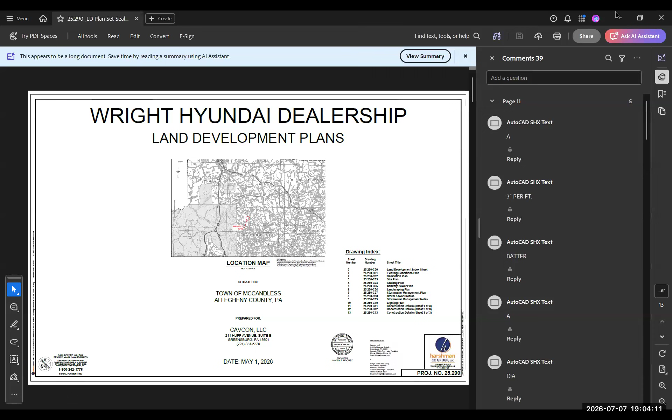It's been boiled down to your current engineer comment letter, and my opinion is that all of these are really housekeeping things that will not affect the overall plan at all. A lot of them have to do with some stormwater nitpicky things that honestly are not going to change the plan, but we've got to get some clarification. One example would be the energy grade lines, hydraulic grade lines of the storm sewer flows. We've given the water surface elevations. Grade lines of the energies are below that. So again, the additional information doesn't change anything.

There's some volume calculations where you get two different numbers because you have to prepare calculations 2 different ways. Some clarifications, again, it won't change anything. I don't want to belabor you tonight. I'm willing to go through all the comments if you want to. However, I do believe that they are all of an engineering housekeeping nature that would not affect the overall plan. Commissioner Clark, I could see you might have some questions for me and maybe others do as well. I'll be glad to answer those.

I would like to front load my presentation tonight with the hope that we could have a conditional approval on this plan, subject to us satisfactorily addressing these comments with your engineering or planning staff. Obviously, that's your decision. I think we're in a good place that we ought to be able to do that. So if you have any specific questions or you want to take a look at the latest plans, I would be glad to talk you through any particular items.

Start up here on the panel. We'll start down at your end. Bessie, anything? Ron? No questions for me. Mr. Jones? Sorry, I'm just looking at the engineer's letter now. That's fine. I didn't really get the impression that all the concerns had been answered, so. I'd be glad to talk through those, and if we haven't, we need to get that done for you. It's the engineer telling us whether they've been resolved, so.

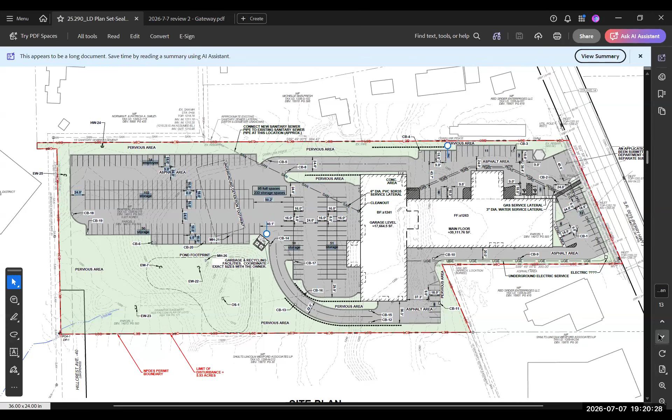Matt, you get a second, you want to flip to our landscaping plan? And so this is again for discussion. Let's see if we're on the right track with what we got in front of the town today. So if you zoom into either of those two areas, you will see the dense row of shrubs, and hopefully we labeled that.

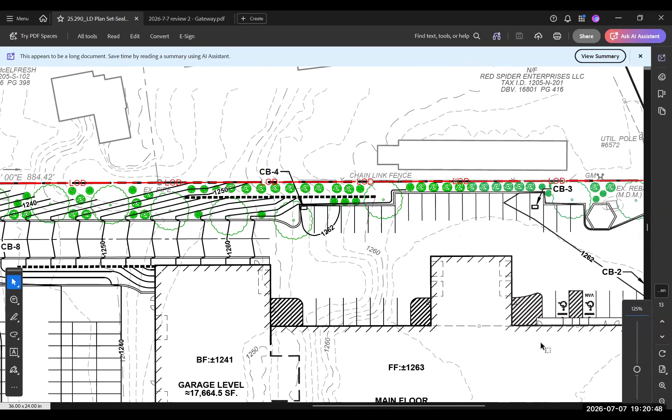There you go. So there's one spot where we've got dense growth shrubs to the north and then to the south. Those are the two areas of which we speak. And there should be a table on that plan, Matt, that identifies the species and the spacing. Sorry.

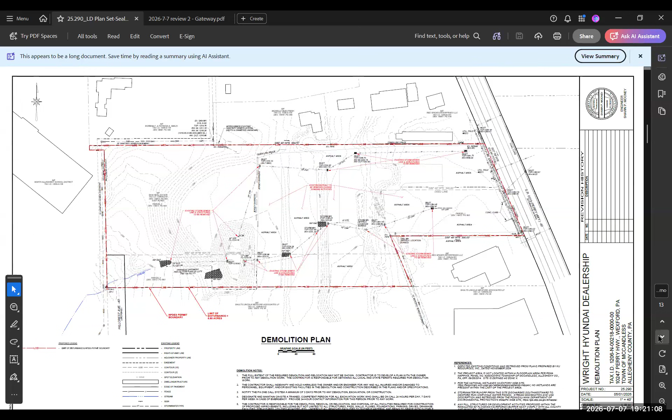Give me a hard time. That's right. I'm not sure.

What I'd like to see is that the buffering is just as effective in only half of the space. Very good. Okay, right, that's what I'm trying to get to. I don't want to have half of the buffering just because we have half the space. We'll do this also. I'd like to give you, between now and next month's meeting, a zoomed-up detail of that, just a little additional description so that it's more clear than just looking at all the engineering plans and details. Again, let's make sure we're accomplishing the intent.

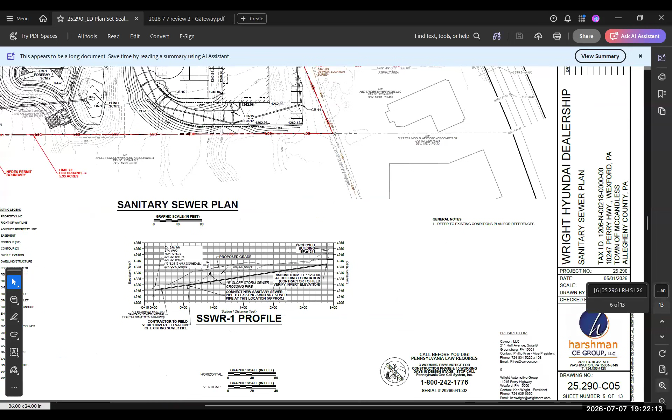Read that plan to see what the legend says. So, what is on the left? I'm going to assume, in that buffer in the front where you're looking at 7 feet, that those will be some sort of evergreen or constant. Yes, that's right. And I forget the name of them. I just saw it small on this plan. Let me zoom in, I can explain it. It looks like the symbols here that have the swirly, those are evergreens. And then the darker ones were smaller plantings.

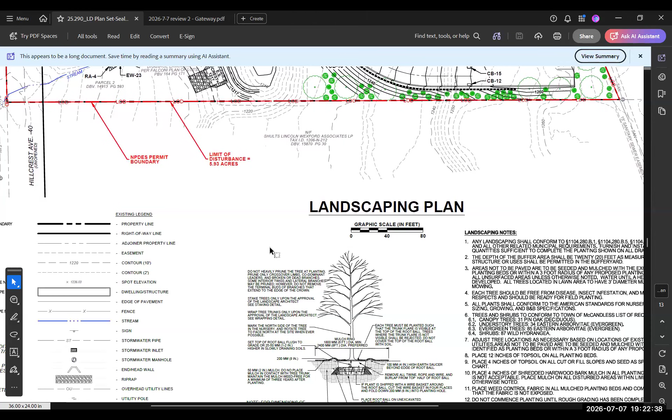And the specific species we had in mind, they're called like a tall boy or a big boy or something like that. They grow up real tall. You plant them to make basically a screening fence out of evergreens. And they'll grow up, I don't know. Yeah, I have it shown right here. It's kind of hard to see. It is within the plan set that you have in front of you, but they do show a tree planting detail and it is labeled on this landscaping plan. Last time I brought a whole hard copy of the drawings. I didn't bring them this time because of the screen.

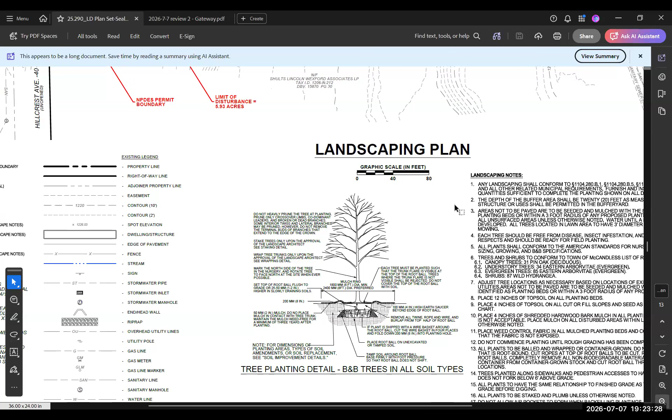And I hope it'll go without saying, but deer resistant, if that's even possible. Yes. The bush I'm thinking of, there are specific deer resistant ones. You see them all over the place. They're beautiful. They make a fence. You can't even see through. There's an arborvitae that is in fact deer resistant, most are not. Maybe that's what you're talking about. No leaves, nothing. You know exactly how tall the deer are in the neighborhood.

That's right. Exactly. I would even recommend, if you're going to showcase a little bit more regarding this buffer, you maybe want to show what the pre-existing is on neighboring properties and what the buffer looks like, just to give an idea. Yeah, pre-existing conditions, that's a point that I haven't done well communicating, because right now there's nothing, there's pavement right up to the property line, and I'd like you to be able to see the level of improvement that this would bring to the table. Having driven by there, there's pretty much just pavement. 90% of the property looks like a moonscape, right? I agree. And we appreciate you trying to improve upon that, because that benefits all of us. Yes, agreed.

So, did I steal your thunder on the buffer? Okay, so the only other thing, you're still working with PennDOT on the access? Yeah, so there are 2 third-party permits hanging out there: the NPDES permit through the Conservation District on erosion and stormwater, and the HOP. We know PennDOT built the entrances to this property. However, when we talked to PennDOT, they said, yeah, we built them, but you still need a permit for it. So anyway, that application's been submitted. The process with PennDOT takes a little while too.

Again, I know I asked you for conditional approval tonight, but in all honesty, it's going to take us a while to get through PennDOT and the Conservation District anyway, so we're tracking well, and this discussion is good. And the application to PennDOT, does it include a sidewalk that would meet the town specs?

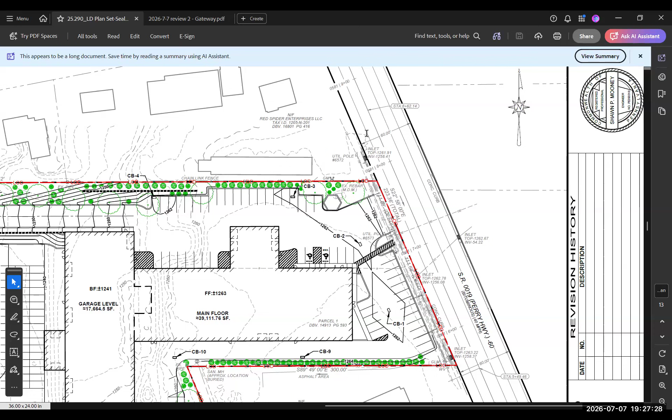All right, on to new business. PLC 26-16, Peebles Elementary School Plan Consolidation, Block and Lot 716-K-248 and 716-34. We have a presentation. The floor is yours.

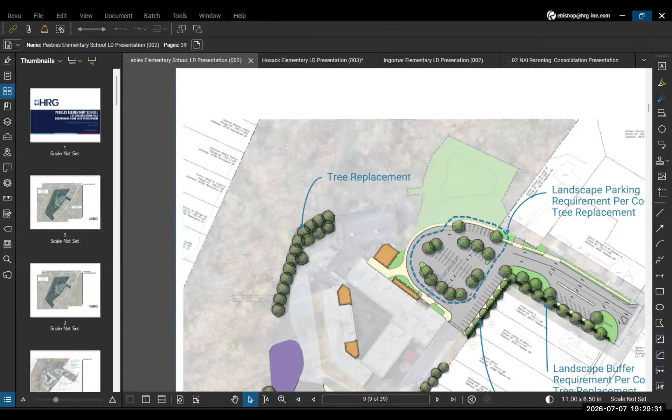We're gonna have Craig just present all the items, so I don't have to mess with this computer. Maybe we coordinate a little bit. For all the schools? Yeah, okay. All the rest of the items are all his items, so. Okay. You need to share. Are you able to? If not, I might have to just make you a host. You can see it. You on the bottom right above. Yours looks a little different than mine. I still have everything, if you need me to pull stuff up, I can, so we'll make it work. Totally get that, trust me. Big time, technology's technology.

Anyway, while that's opening back up, I'm Craig Bishop with HRG. I know I was here several months ago for Peebles regarding the rezoning for that residential lot. So we're back now with our land development submission for preliminary and final land development, and we also had the lot consolidation plan where we're consolidating that lot that was rezoned. I do have with me Brandon with North Allegheny School District, Josh from HRG, who's also working on this project, and Thomas with Schrader Group, who's the architect on the project.

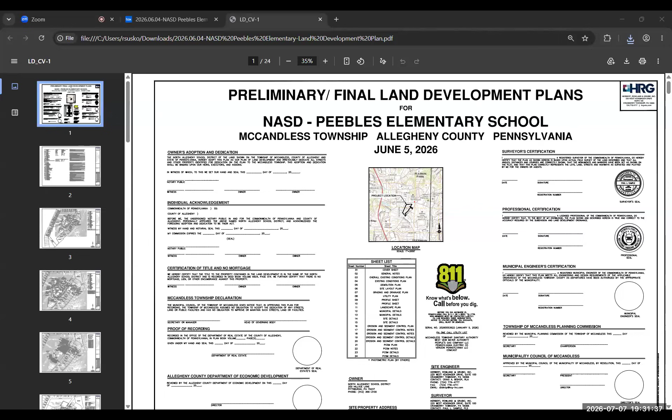And Craig, if you want, I can share the plan set, that's not too big of a deal. Maybe I'll just let you do that. It's fine, I do it every month. All right. You want to do the consolidation first? Yeah. Which item are we? The consolidation. The Peebles plan? We're on Peebles 26-16. That's what you're presenting first, correct? What is that?

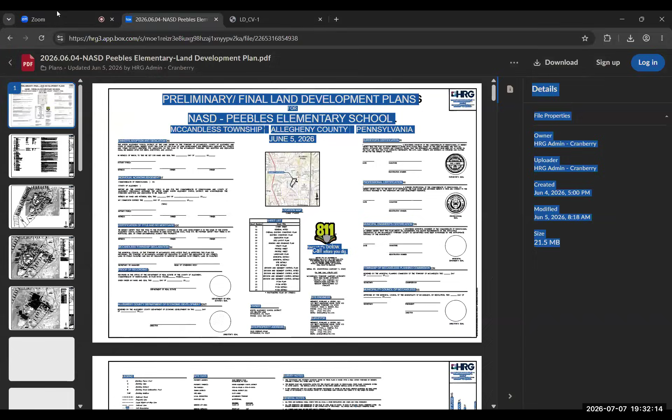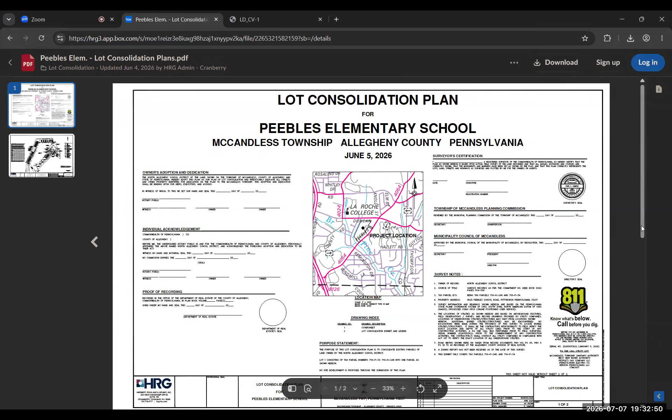So as I mentioned, maybe a couple months ago now, we were here for the rezoning, where we rezoned that parcel out front to SD, special district. So now we're back with our consolidation plan to consolidate that parcel out front next to the Peebles entrance drive into one large parcel. That would then allow the district to widen that entrance to make it safer for traffic and buses coming in and out. We submitted the lot consolidation plan and got some comments from Gateway. There are some plan edits, minor notes and calculations, and adjacent property owner information that will get cleaned up, and we'll resubmit and address all of those comments.

But I guess it was two separate. Yeah, so this is one application that is a lot consolidation and a land development. So we can correct that.

We're gonna act on one application for the Peebles item. The way we broke out the agenda was that there was a consolidation and land development for Peebles, for Hosack, for Ingomar, and then for the rezoning and lot consolidation — those are each separate items. So then, I don't know if you have the plans.

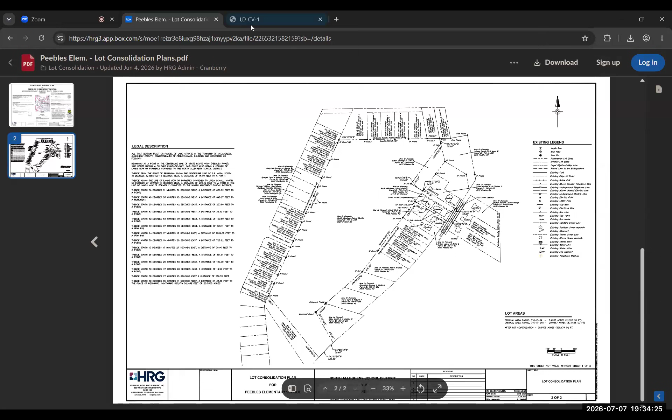I have both of them. Wish I could do my presentation because I had all these nice color things, and it was gonna be fantastic, and it's gonna answer all of our questions. I didn't hear that you emailed it to me, I'll pull it up. This way, plans. And you'll just have to do the next slide, please.

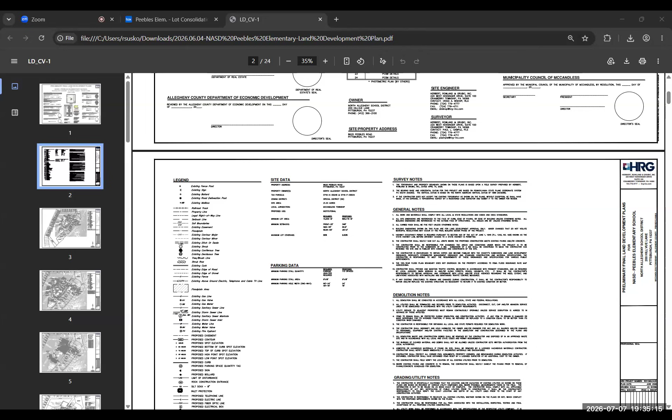All right, I got it up. You got it up? Yep, I did. There you go. Perfect. Sorry about that.

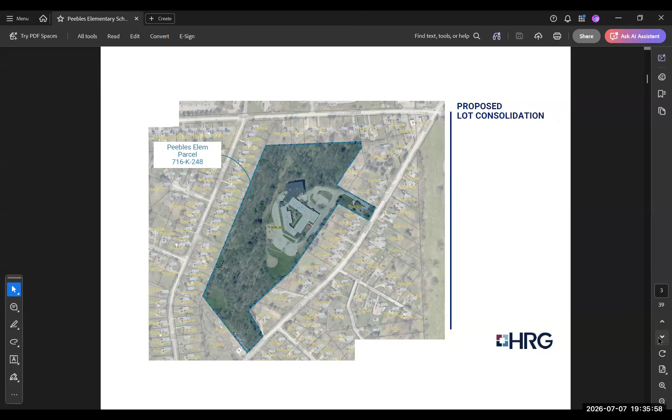So this slide is our existing conditions. I'm sure all of you are familiar with Peebles Elementary School and what's out there, but I can just do a little bit of explanation. In the front, there's a 20-foot wide entrance, and then there's that existing house that now will be consolidated. As you go back, the buses come in and go around that loop and drop off, and then the parents continue in and take a left, and they will drop off and pick up their kids. We'll get into more details later on as far as logistics and how we're looking to improve that pickup drop-off with these improvements.

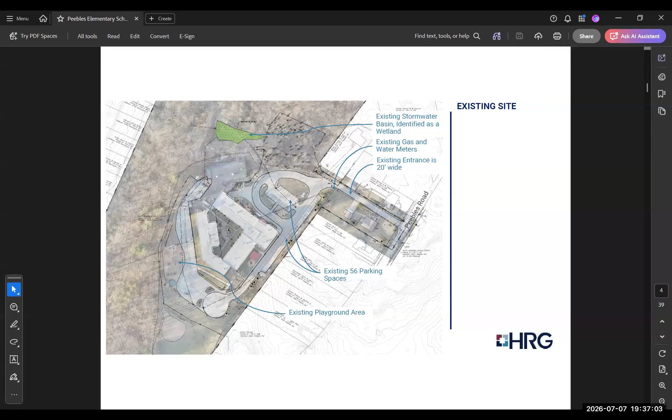And then there's also — sorry, Matt, go back to the upper slide — you can see something highlighted in green. That is actually an existing detention basin on site. We did go out to verify if there's any wetlands on the property, and that area was saturated with wet and did have cattails, so it was flagged as a wetland, but it's actually a stormwater detention basin currently on site that is currently managing their stormwater.

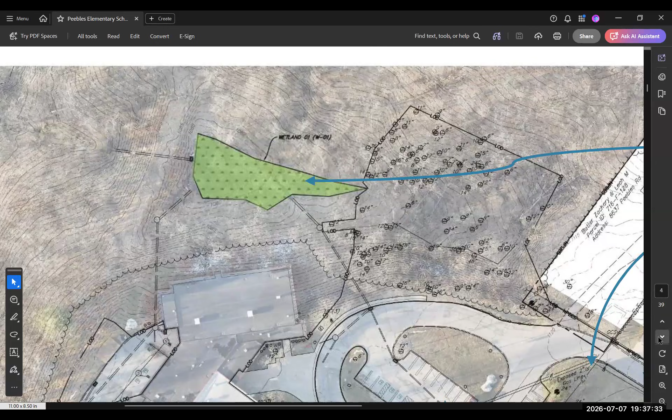If you can leave it there, Matt — actually, sorry — but to the back on the existing conditions, where that stormwater basin is, there were some existing trees, and we did go out to pick up which ones in that area were greater than 6 inches, because you'll see later on in our proposed improvements that we'll be impacting some of those trees, and we're looking to meet your guys' ordinance and try to mitigate those trees on site. I guess, Matt, you can just go to the next slide.

So he already kind of presented this and revealed our proposed site layout, but at the entrance is the main improvement that the district was really trying to achieve — to improve safety coming in and out of the site. You can see on that plan we have a 16-foot wide lane coming in to the right, and then going out we've created two lanes: a left turn only lane and a right turn only lane. We also have additional parking off to the side, and pedestrian sidewalks that would collect folks who may be parking in that space in the front and get to the entrance safely. We've also added sidewalk on the other side of the entrance where vehicles will be coming in, in case anybody in those residential houses — students, parents, whatever — would need to walk to the school. It provides them safer access to get their children to the school.

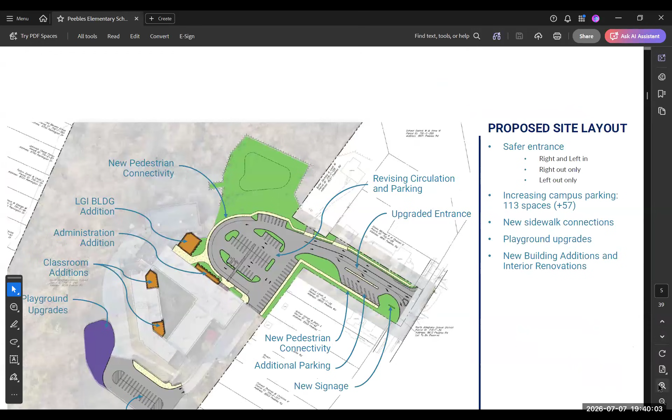So if people are approaching from the south, rather than having to cross the access road and then use the sidewalk on the northern side, they could just extend that southern sidewalk that stops at the parking spots all the way to Peebles Road. So anybody walking to the school from the south could use that sidewalk rather than crossing where people are turning in and out. Yeah, I mean, we could assess and look at that.

I think the reason we didn't do that is there was no sidewalk out there, and we didn't want to promote kids walking to the school on Peebles Road, which could be busy, without other connected sidewalks. I just thought it would create a dangerous scenario. But we could definitely look into it.

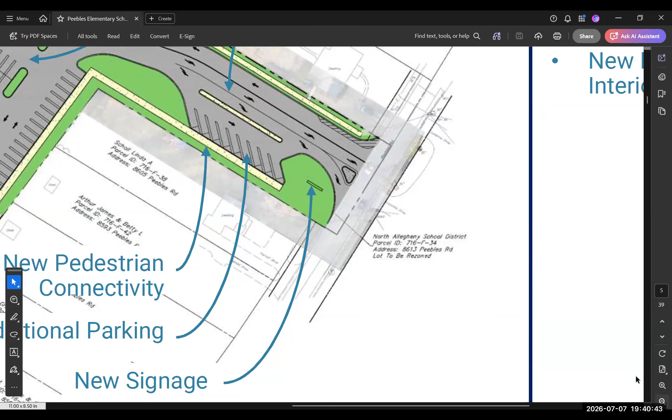Look at the sidewalk on the north side, you could create the other side. It would seem like we'd either want no sidewalks or... that's a good point. That's a good point. I can't use that one. Yeah, well, we'll look at it. Okay, that's valid, it's a valid statement. If there's a concern about safety, that's a valid thing to consider.

But then I would say, let's get rid of the little segment on the other end. Yeah, that would be my preference if it's a safety issue—there was no parking on that side, so there wasn't anybody needing it.

Is there room in the frontage to put sidewalks on Peebles, which would be a typical development requirement? There's a little bit, but it's pretty much all taken up. It is correct, yes.

Brian Chivolo, Director of Facilities, North Allegheny. The reason we have the sidewalk on the upper side is for a neighbor up on the street whose children go to Peebles Elementary. Currently there's no sidewalk there and it's a safety concern, so we requested to put at least a sidewalk up to the garage, and it seemed odd to just stop there, so it goes all the way up.

Can I just ask—is Peebles a walking school or is it all bused? All bused. But these people walk, well, they're the first house. They're just asking, it's all bused. Okay, well, let me clarify that.

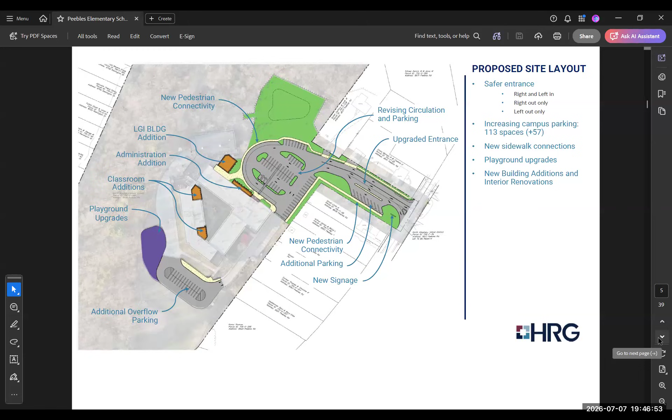So the additional percentage of lot coverage is with your additional driveway, parking, and buildings. Are you proposing, and is the engineer reviewing, that the existing stormwater management facility will handle that, and you're not proposing any further? We are proposing some, actually - that's a little further in the presentation, so I'll hit on it in a slide or two.

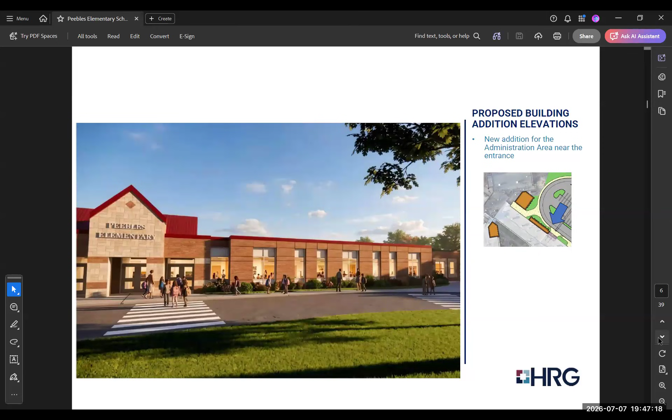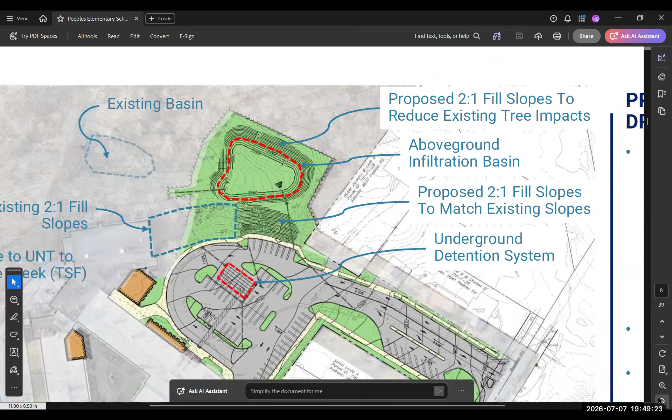It's a substantially treed lot - yes, that looks like there'll be quite a bit that will have to be removed for that stormwater. Yes, we'll get that done. You're spot on with your assessment of all this.

So we are providing some landscape buffers and things that are the requirements of the ordinance for screening and things for the parking. The landscape buffers, I know that there were some comments from Gateway. I think we need to do a little bit of cleanup and maybe a little bit of additional buffering in some areas. But to your point, Ann, we are removing a lot of existing trees that are over 6 inches in diameter. And the exact number, I believe, 74.

So we are doing our best to replant them on site. It's a little difficult because of how tight this site is, with their current ball field and their playground, and trying to keep good sight lines. We're not able to mitigate all of those trees that we're cutting down for this development on the property. So we were doing our best. We're well short. That was one of the comments that we did get from Gateway, and we did want to have a discussion with you all on how to move forward with that.

So I know in talking with the district, they would prefer if we could do a payment in lieu of for any of the trees that we can't fit on site, and we'll do our best to fit as many as we can. But as you can see, there's 74 trees. Is it possible to do plantings on other school district properties?

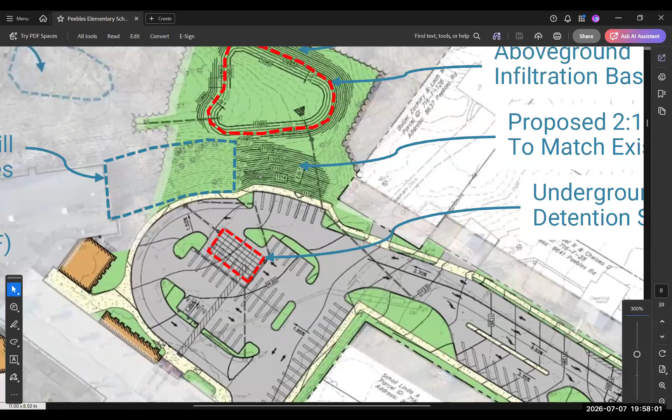Matt, if you flip back to our grading plan. Oh, yeah. Because we've actually wedged it in there as tight as we can. Oh, I know. So there's a steep slope we're up against. Again, that's something else I wanted to touch on, because as the other gentleman was here requesting a waiver from the slope requirement.

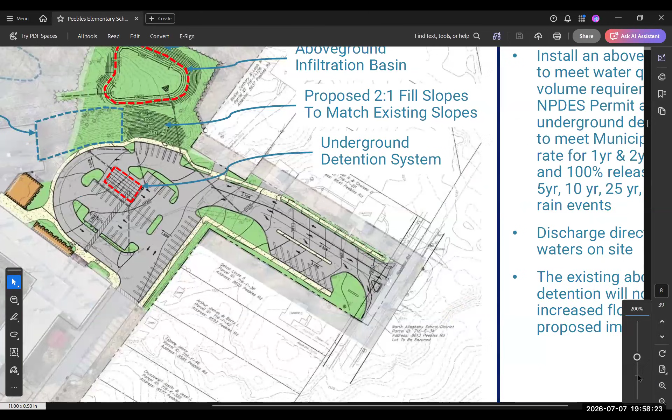We do have that on this project, so we are proposing a 2-to-1 fill slope. And again, we're trying to minimize the amount of trees that we're impacting by doing that. So if we did a 3-to-1 fill slope, that would go out a lot further, and then the basin would push out further, and then it would cut out more trees. So we've really assessed everything on this site, trying to meet all the requirements of the different agencies and your guys' ordinance, and taking that all into account, we felt like this was the best solution.

Can I just ask a practical question on the parking? Who's gonna park in those spaces in the front? Are you that short on parking? Yes, we are. Any given school day, especially during the AM and PM kindergarten changes, we have 15-20 cars parking on the grass now. And the reason why we're doing some of these additions, like the two in the courtyard, there's so much more outpatient therapy needs, counseling needs, special ed requirements. We're gonna only put 9 kids in a room. It's tied up more classroom spaces.

So we're not adding any staff, we're not adding any students to this building. It's just trying to accommodate what we currently have in a more efficient manner, and being able to have music in an actual traditional music room, not a classroom. So a parent picking up somebody from kindergarten isn't gonna be parking there? Up front, no, we're hoping staff's gonna park up there, so that way the parking in front of the building is open for visitors. Okay, and that's something you can control. Okay. Thank you.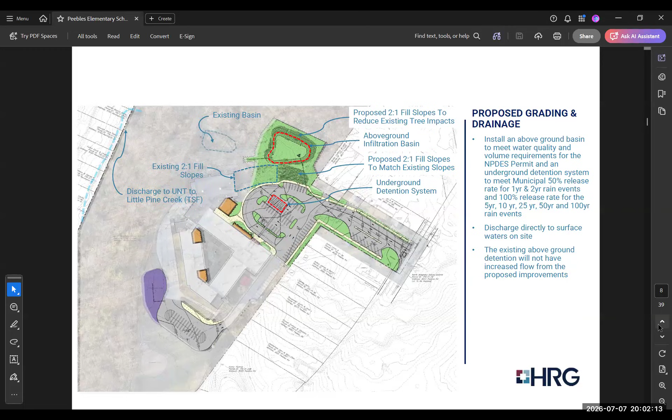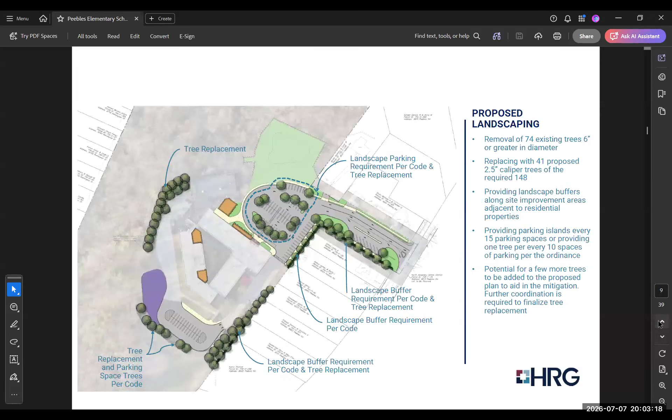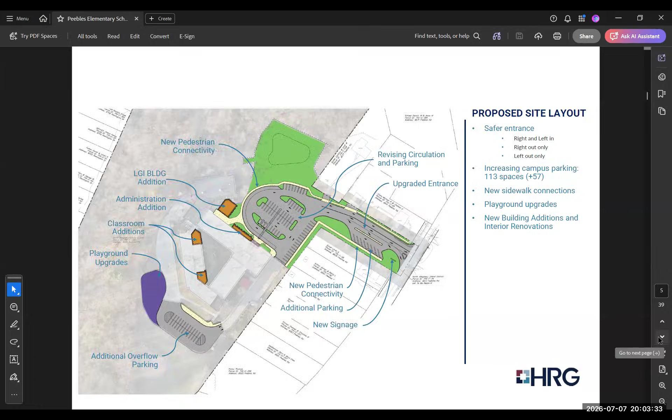So with these improvements, Matt, if you want to flip to the next slide, as tight as it is, it probably still isn't the best, but we're trying to do the best we can to improve this. The red is still going to remain as the bus looping and dropping the kids around the front. But in yellow, with some of this added parking, we are adding some extra linear feet for parents to queue.

So they'll still be queuing the same way that they are today, but they'll have a little bit more queue length. And where that congestion is, where the buses and the parents, the red and the yellow, may mingle together, we are widening that throat, which I did not mention previously. That was on our proposed improvements. So we are widening that to allow space, so if a car is there, a bus can make a turn and get out.

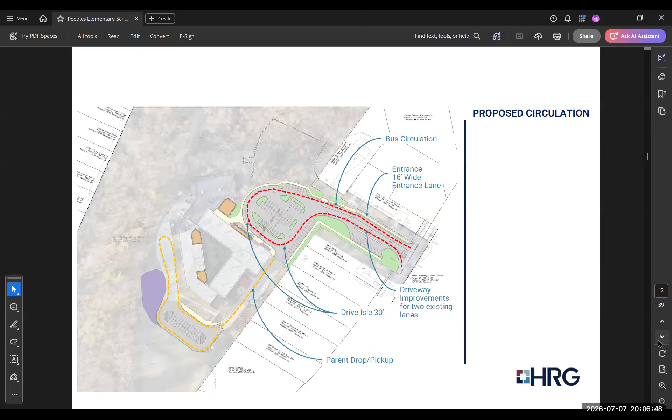Yeah, so then just some quick permitting updates. Like I mentioned, we have submitted for our NPDES permit. We did get completeness comments already, and we've addressed those and have resubmitted that back to the Conservation District. And I mentioned that we are coordinating with PennDOT on our new driveway entrance.

And I did just want to mention, since we're not increasing student count, we're not increasing sewage flows, so we don't need to do a sewage mailer or planning module. I don't want to go through all the comments, but I will happily answer anything that anybody has with any of these comments.

But there were just some of those items that I did want to discuss, and we did highlight some of them already, but I want to make sure that as we're making our revisions, we're all in agreement of the direction that we're going. So the one item, I guess, was on page 4 of 8. It was that sidewalk comment, and I know we had talked about that earlier.

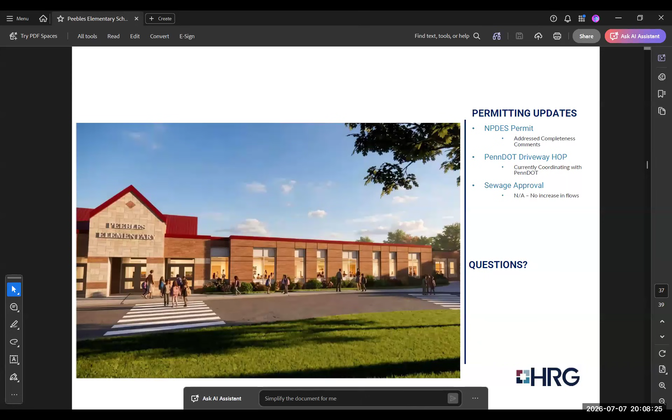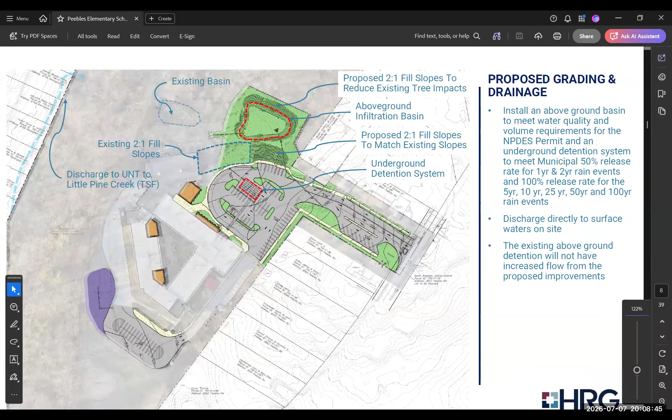There was only a little section there in the front, and the comment was about adding the sidewalk up along Peebles. As I mentioned, there is no connection to any existing sidewalks. So we were considering asking for a waiver for that and wanted to get any feedback from you all, if that is something you would consider. And we can revisit that piece in the front if maybe we pull it back.

To be honest with you, we did it because we talked with Matt and Kelly during our concept plan review, and they had mentioned McCandless was looking at maybe doing some sort of crosswalk there. And we told Matt, okay, we could extend the sidewalk out and coordinate with McCandless if McCandless ever wanted to put a crosswalk in there. So that is actually why we extended that out. Otherwise, we probably would have left it short like we did on the other side.

So that was one waiver request for this project that we'll be asking for. I don't know how to phrase the question. Modification. Yeah, and I can add to that, the town is actively pursuing some type of crosswalk here, some type of pedestrian movement in front of Peebles. So that was a part of the conversation and part of the pre-application meeting.

Should there be hatches on this plan for a crosswalk across the entrance? No, because it's not part of their development. It's something that the town is doing separately with PennDOT, in PennDOT's right-of-way, yeah.

Well, I would say, going back to the conversation earlier, to me there's two options that make sense. One is there is a future where we're going to be doing some sort of sidewalks along Peebles, in which case I think you want to extend both sidewalks to Peebles, to not promote people from the south crossing the road when people are turning in and out.

So where does the bus stop for that neighbor that's right there? It's in front of the garage. It's actually up at that curb cut. Yes, right there. So creating that sidewalk there, they'll actually walk down the sidewalk and around the building, so the sidewalk doesn't need to go beyond that. Correct. Okay. So we shorten both sidewalks.

How much linear footage on Peebles Road is there, given the location of both of these sidewalks and assuming that the southern sidewalk just keeps going straight? 4 feet? Cause the northern part was pretty close to that property boundary. Where that little driveway is, I'm assuming that's staying there, right? And that's not very much. It's probably like 30 feet there, right? Sorry, what?

He's asking how far setback the sidewalk is. No, on Peebles, assuming that southern one goes up to Peebles, just extending it. There's not very much along Peebles to put sidewalk in. It would probably be 30 feet. Cause that parking space is like what, 18, 20 feet deep? And then adjacent to Peebles, you're talking like a couple feet that would be in the right of way for PennDOT.

That was what Gateway had commented on, the requirement for sidewalks to be adjacent to roads. I think the question here is just how much are we actually talking about in terms of linear footage of sidewalk that's adjacent to Peebles, not going to the site? Like a couple feet probably, that PennDOT would have to approve. Yes, if it's in the right of way.

And I have a question that's tied into this, which is the comment about the screening buffer to the northern parcel. I understand if the sidewalk is gonna stay, and with not wanting to create more sight impediments for people turning out there, that you wouldn't necessarily want a big buffer right there. But are you gonna apply for a modification for that, or is there something that can be done to meet the comment but not require a modification?

So I wasn't gonna talk about that tonight, because I did want to get clarification from Gateway and Matt on exactly what the intent of that comment was. I didn't know if it was referring to the parking spaces that are close to that property, like screening the corner of that parking. If that was the intent, then it would not really be going along the entrance to impede visibility. Sure. But I did want to get some clarification on that.

Off the top of my head, going back to the filtering and softening buffer requirements, I believe there's a requirement for any adjacent property to have some type of filtering or screening buffer. I think that comment would have been, is there a formal request for a modification adjacent to these two residential properties? Because technically the code says you have to have a buffer for any portion of your development that you're extending, from my understanding of the code.

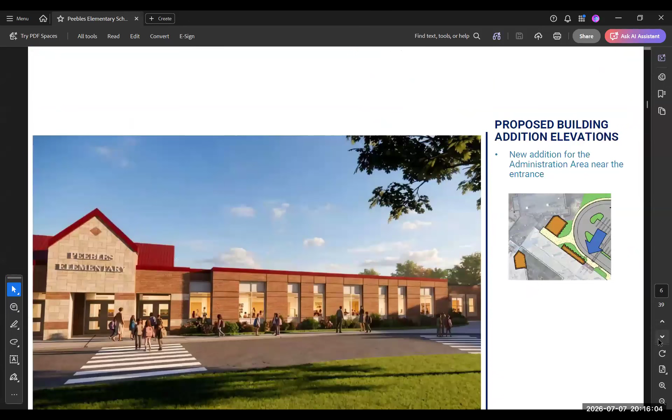For that sidewalk, I'm not concerned about safety because of where it's off the driveway. I think that comment was on the opposing side from the parking, about whether there should be a buffer requirement, or what the code says, and whether you're requesting a waiver. The ordinance does say the sidewalk can be within that buffer, so by the time you add the sidewalk, there's not much space anyhow, so we're looking at a potential trade-off.

All right, so that was the presentation for PLC 2616, Peebles Elementary School Plan, Combined Preliminary and Final Land Development and Lot Consolidation, for Peebles. Yep, that's Danny.

Do we have any public comment that we haven't already heard? I'd say no. Okay, so we can take a motion on this one. So we would motion to table this, as I understand the plan. That's my recommendation.

Should we give you a discussion on your retention area, where we're cutting the trees down? Did you ask for alternatives, like planting them on other property? I feel like we've really assessed the site. There may be able to squeeze in some more, but I didn't want to keep adding a bunch of trees in areas because the district has a concern with safety, so there was no way we were going to meet those requirements.

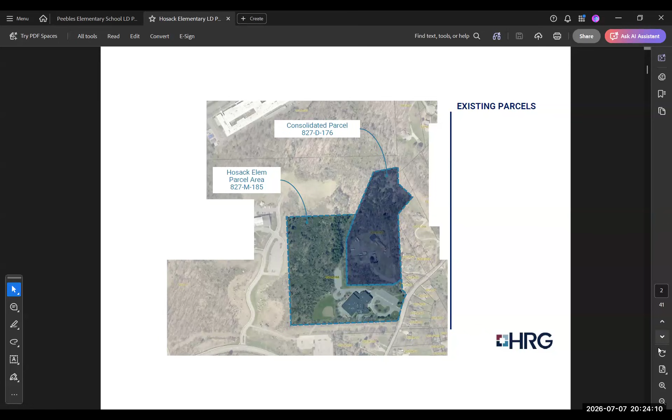If you still want to go to the slide, this slide was just showing those lots being consolidated and what that overall tract boundary would look like.

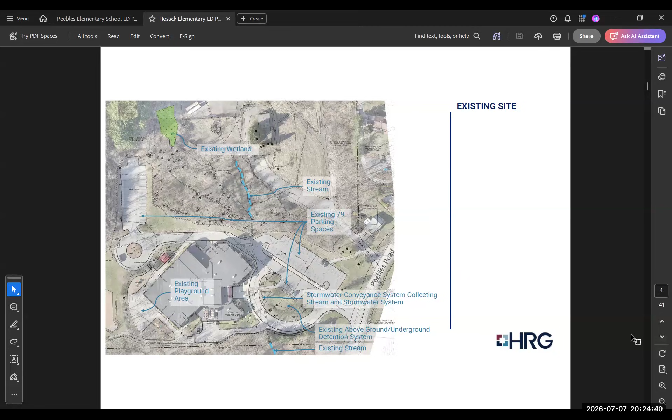Again, as we talked about at Peebles, this is existing conditions, so I'm sure a lot of you are familiar with this facility as well. I won't go into a lot more detail like I did on the other one, but I did want to highlight, on Plan North you can see in blue we delineated a stream that was on site, and in green in the upper left is a wetland that is on site as well.

Go to the next slide, Matt. So this here is our site improvement plan.

Similar to Peebles, we were assessing parking and trying to maximize the need for parking for the district and traffic flow as well. And then they're also adding, similar to Peebles, onto the administrative office area to the front, and adding an LGI addition. As part of this project, they'll also be redoing the playgrounds, getting new equipment, and revamping that whole area at the back.

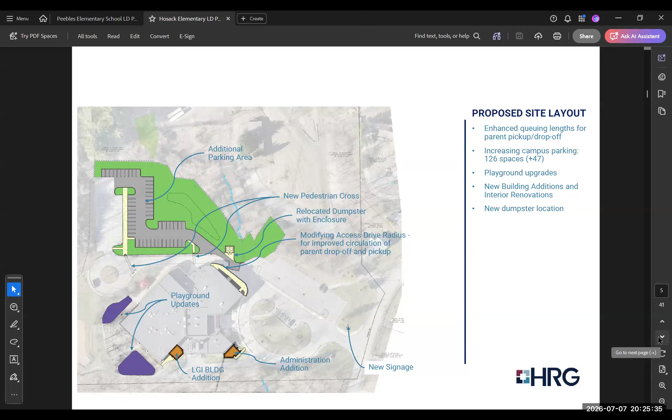You can go next slide. So this here, again similar to Peebles, is just the elevations showing these additions, showing that the materials the architect is using really do a good job of matching to have it blend in and make it look like it was always there.

If you go to the next slide, that's the LGI room with the bump out. So they added some great windows there to add some natural light, playing off the materials of the building to help it blend in.

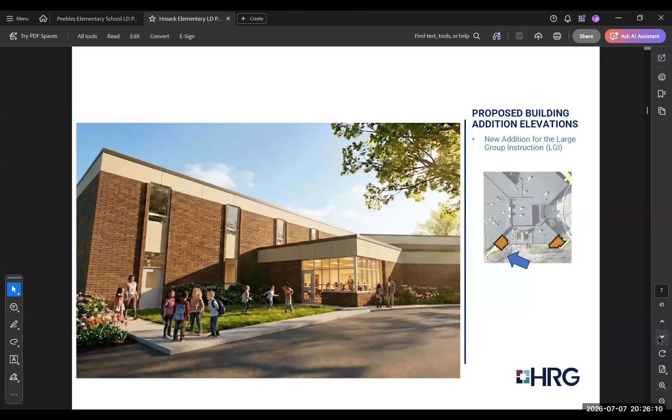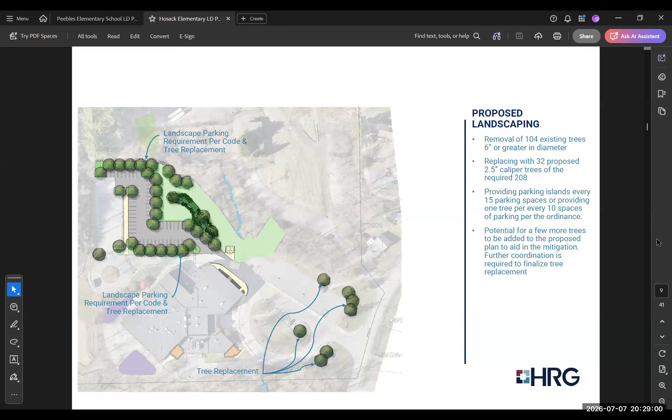On the corner, there's still two existing buildings there. We're looking at demoing those out, and that would add to some green space, but there's also talk about possibly looking at developing something there. So I hate to say we can put some trees there, but then we're coming to you in 5 to 10 years saying we're taking them down. I just want to be transparent with that.

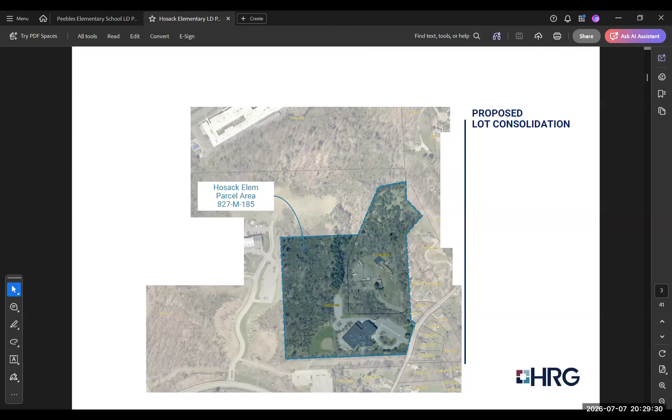The additional parking that we're showing there is twofold: one, it's for additional parking; two, it's for the car rider traffic. It goes around the building that way, and right now it does back out onto Peebles Road. So providing this additional parking gives us more cars we can fit on the lot for pickup and dismissal.

Don't tell us you have a junkyard on site, please.

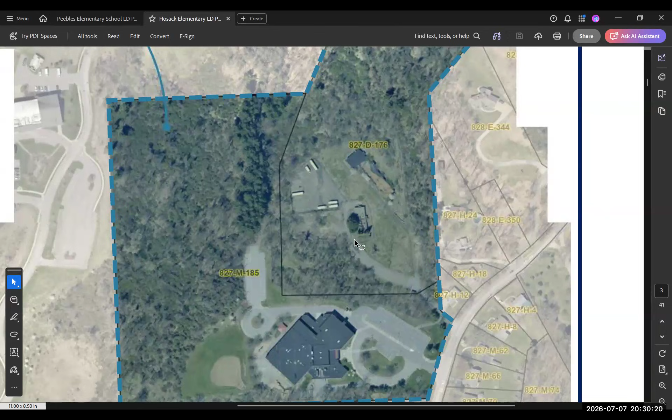Right, no, we don't. But there are also buses that we do keep there, and we need them for the spring season athletic runs because the athletic runs need to leave so early. We don't have enough buses on our lot at Cumberland to accommodate keeping them parked there, so we keep them parked over here. But this is previous experience with these former Nike sites.

Have you done the ground survey for hazardous material? You can disturb the ground.

I'll leave that with you. Yeah, no, we have not done that yet. I know the district is looking at demoing those buildings, so I think that was probably something that's gonna come up when we come to McCandless to demo those. Yeah, I know all the soldiers there were very careful about all their petroleum and fuel spills and all the rest of it. We ran it. I was the Corps of Engineers. We took the Westview site and we ended up, we couldn't touch it. I mean, we couldn't remediate it. Yeah.

So you are doing that investigation? Well, if they move forward with the improvements and things on there and they do want to look at demoing those buildings, I think as part of that, as a review with McCandless, that's probably something that was going to be required. What about the areas you're disturbing? It's still part of that site, right? Things could have migrated. That was just a question. Yeah.

If you're doing soil testing. Yeah. We did. Yeah, we didn't do it. We did testing for infiltration and stuff in that area. So far? No? We did do a geotech. We did it for the buildings. But we did not do borings out in that area. You can, as long as you don't disturb. So it's like- I'm sorry.

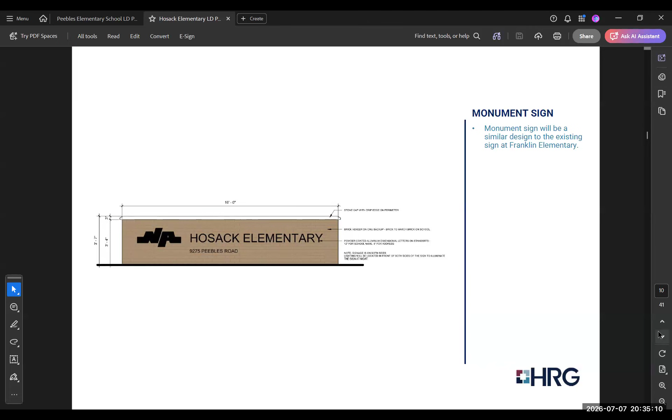Again, just showing a monument sign that'll be proposed on this side out front, so it'll mimic the building materials similar to what was shown at Peebles, and we'll match the Franklin Elementary School monument sign. As Brandon talked about a little bit ago with the drop off.

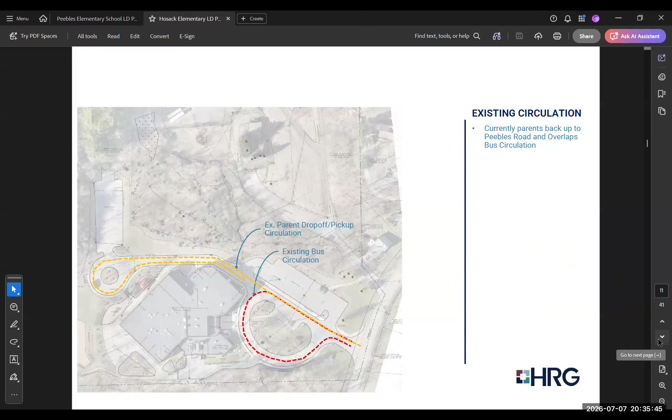So one benefit with this plan and the location of the parking is we will greatly improve queuing at this site. So this is the existing circulation. The buses come in there in red, and then in yellow is currently where they're backing up, which is out towards Peebles. So there's a little bit of congestion there with overlap with buses and cars and vehicles backing up on Peebles. So if you go to the next slide, Matt.

So here, the bus circulation will remain unchanged, but by adding that extra parking in the back, what you're seeing in yellow is actually the same length that was shown on the previous plan. And we're beyond that pinch point where buses and cars would come together. And if it becomes a problem, they could even loop through that existing parking lot to add even

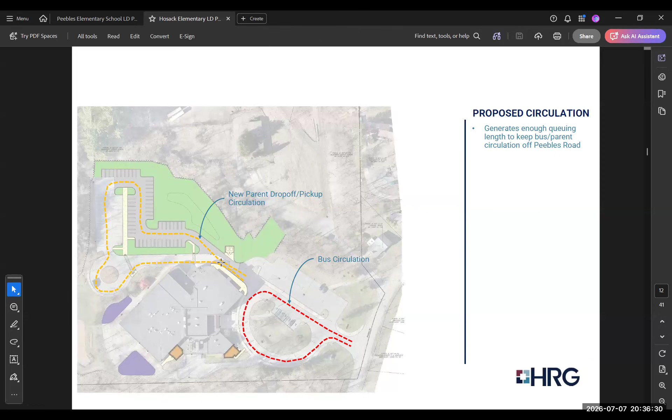more queue length. You can't go that direction in that parking lot, right? The way the mouse is going. No, you cannot. It's one way. You're correct. It is one way. So they would enter the driveway and then take an immediate right and around. And if you want to go to the next slide, Matt.

And then a lot of the comments are pretty similar in all these projects. So we had the tree thing that we already talked about. We did have the slope requirement, like we discussed a little bit at Peebles. We are going to assess that, and we're going to see what we can do to try and meet that. So we'll do our best to try and get slopes 3-to-1 or greater. But if not, that may be something that we come back and request. And the slopes on this site, if we did 2-to-1, are very minimal. But we would get a geotechnical report to justify that request.

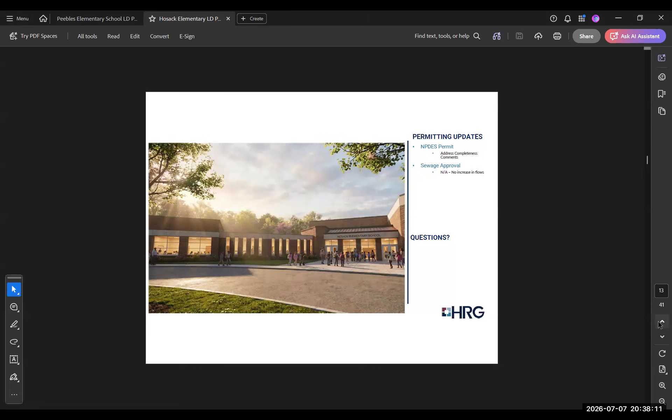And then I think sidewalks was another item. So it was the same thing on Peebles. There was no sidewalk at Peebles, and connecting that sidewalk all the way out to promote people to walk along Peebles just didn't seem like a good, safe idea. So that was something that we would be asking as well. Or state road, but, yeah.

The driveway that is shared with the adjoining property. Yeah, so that is on the northern site. There is a separate driveway that goes to the Nike site that Brandon was mentioning, where they have the buses and things. So there is an existing residential driveway off of that driveway. So we are going to be planning to use that during construction. Right. So we're not impacting any of that entrance currently, and they can keep the school functioning during construction. So we will coordinate with that property owner just to make sure they're aware of any construction activities that may potentially impact them. So I think that comment was asking for an easement, an agreement.

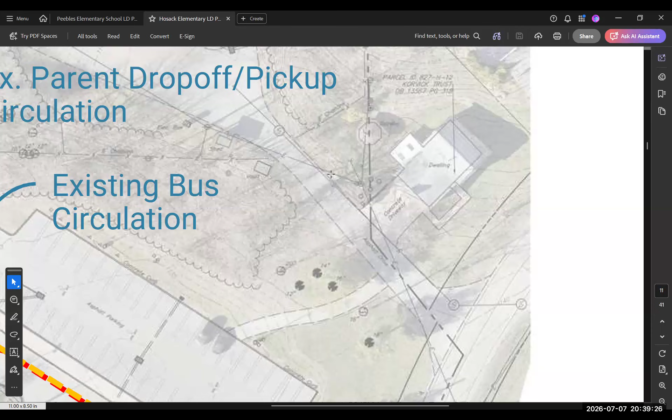Yeah. So I've already talked to Brandon about that. They may have even already sent that to their solicitor to start assessing what that agreement will look like. And I know at Peebles we didn't talk about that, but I know they're planning to, and have already reached out to the neighbors. They're going to be talking to them about these improvements, and they'll be doing the same with that neighbor to address that comment. That property has frontage on Peebles. Yeah, it does, but the driveway comes off of that other access.

Yeah, I thought we discussed it internally, that there needs to be some kind of an easement agreement. Yeah. And so maybe something put on the plan that notes that there's an easement there. Yeah, so I don't know if there currently is an easement, but if we do that, we'll make sure to get something.

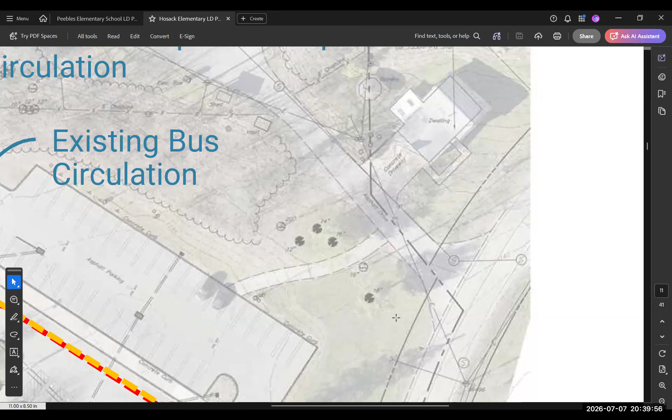How much footage adjacent and parallel to Peebles is there on this one for potential sidewalk? Don't know that number off the top of my head, but just looking at that, maybe on the upper right, maybe 120. And then maybe down towards the bottom, like 60 to 80. I mean, maybe looking like 200, 220. I don't know, just a rough estimate.

Any other comments? Other comments regarding this matter? And I think we'll need the same item here. For the PSC 26-17 Hosack Elementary School Plan, a motion to table. Can I have such a motion? So moved. Second? Second. We have a second. All in favor of tabling? Opposed? We are tabled. All right, next item on the agenda, which is PSC 26-18.

Ingomar Elementary School Plan, combined preliminary and final land development. Block 943M309. All right, maybe it'll be similar.

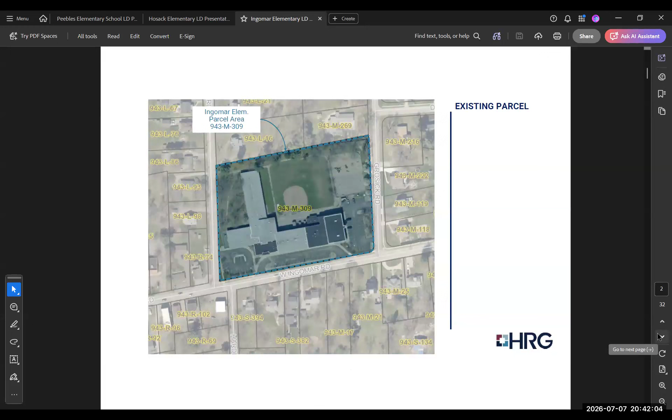Except we don't have block consolidation on this one, so it's a little different. Yes, Matt, if you want to go ahead and go to the first slide. So this is the existing parcel. You can see there in that aerial, this site is very tight as well, with all the existing features that it currently has. You can go to the next one.

I will highlight a few things stormwater-wise on this plan. When we were doing investigation, walking around, trying to understand how the stormwater was flowing in and being conveyed on the site, we came across underground detention currently at this facility that is out front in the bus drop-off area, up around West Ingomar, right in the middle. It connects down and has an outlet structure with weir plates and orifices that controls that stormwater. Before then, it connects into another underground detention system in the existing parking lot.

So when we were looking at stormwater, we were trying to take that into account and not add new impervious to those underground detention systems. So we're doing similar things to the other two projects and swapping impervious areas. I can get into that later as far as where our proposed stormwater facility is, but I wanted to bring that up while we were on the existing conditions plan. So Matt, if you want to go to the next one.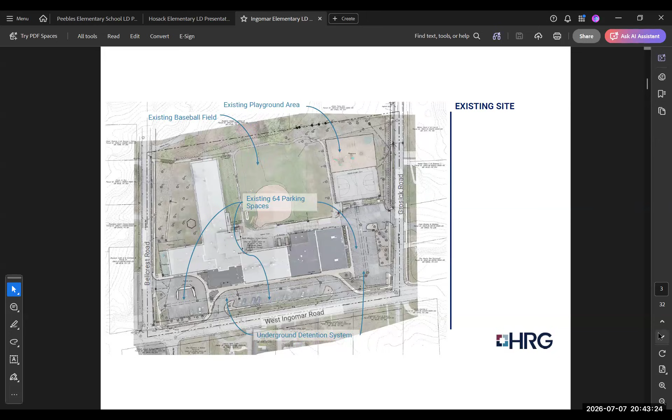So here is our site improvements plan. Again, we're trying to maximize parking. You can see to the plan north, to the right, the additional parking spaces we're proposing with this project, which is currently over the existing playground area. Since parking's over the existing playground, we needed to provide a new playground area, and you can see there to the left, we're providing that.

They currently have a basketball court, so we're providing a new basketball court, and the areas in purple would be potential play areas. We're currently working with the playground manufacturer to assess what types of equipment to put in there. Also to the left, we will be trying to increase that ball field a little bit and renovate it to make it a better playing facility. It's my understanding McCandless actually uses that ball field to play baseball on.

Similar to the other projects, there's building additions proposed with this as well. Moving over to the left, you can see that large orange rectangle that is the proposed LGI room, and to the north of that will be a concrete area where they can have a little outdoor LGI space. Then to the south of that, you'll see an addition by the admin office area, so they'll be adding and renovating onto that space as well.

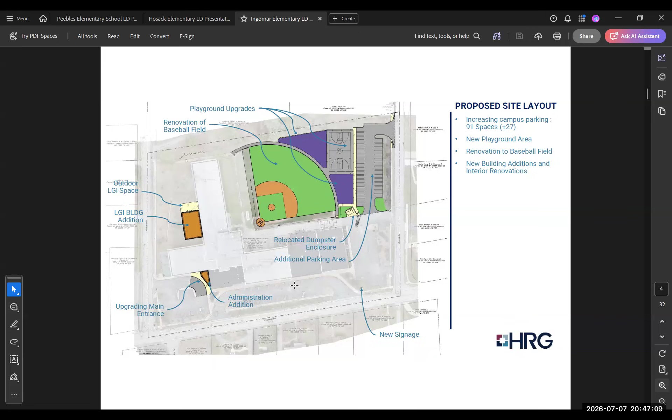Yeah, to the right of there. Yeah, right there in that area. And then that'll stay segregated from that parking lot and the traffic flow through? Correct. Yes, we'll have that all fenced in. It'll be segregated, and gym class goes out there and uses some of that area now.

There's like a bike track that goes around the ball field and everything, so it'll still be retained. Like this playground, like you said, it's much bigger, almost 3,000 square foot bigger than Hosack. So we're trying to keep consistency between the three elementary schools, the size of playground, stuff like that.

Who's that parking area adjacent to the basketball court going to serve? Ideally, I believe that's probably events and things. That'll be for event overflow, but a lot of it is extending the car rider pickup and drop off, because right now it backs out onto that road quite a bit.

So instead of coming in where the dumpster's at, they'll be coming in the back, coming up, and the exit closest to the main road is a right turn only coming out onto that. So that's on the upper right, that's an additional access to Grosick Road? Yes. Okay, you're gonna add that in. Yes. Which there is a comment on. Yeah, that was one of the engineers. We can talk about it now if we want, since we're on the topic.

It's closest to Ingomar, it's awfully close to the intersection. Correct, so that entrance close to Ingomar, you can't enter. It's an exit only, and you can't make a left-hand turn, it's a right only out of there. I know there was something in the ordinance that we can only have two entrance drives off of the road. So when we're looking at trying to address the queuing issue, it makes sense to have that driveway all the way on the other end to add queue length.

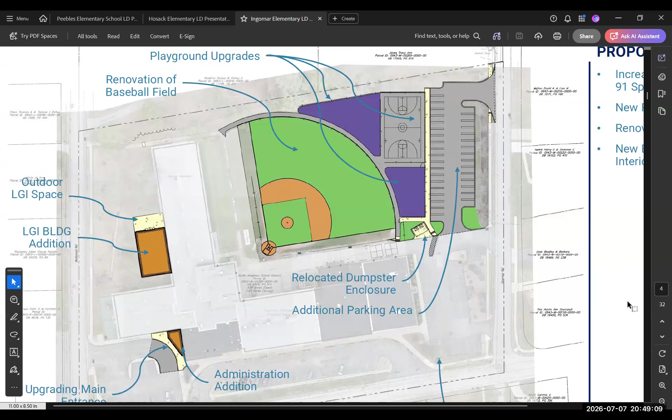And then with the circulation, the central existing driveway that is an exit and entry is used for the service truck that would come in for deliveries and things like that. And there's also a fire lane in there that the fire truck would access. So the existing parking closest to Ingomar, is that one way? I don't believe it is one way, because it's wide enough, it's two way, so they could use the other existing exit.

Theoretically, you could still have two exits without having the one closest to Ingomar Road. That's the question. Well, we would lose our circulation traffic for pickup and drop off. Exactly, because we'd lose parking spaces, so we can make a big U-turn for them to come back. Is it a matter of maybe taking that upper driveway curb cut closer to Ingomar and narrowing it down? You have it labeled as a right turnout only. Sometimes you take those driveways and just make them one way out. So it is narrow already, probably 16 feet wide.

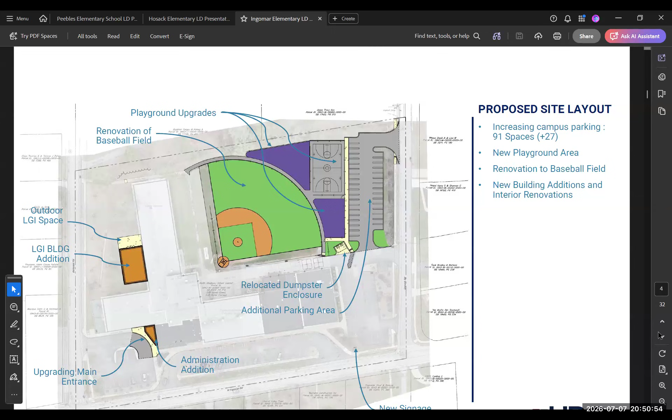To be prepared for this comment discussion, I actually live close to Ingomar and I ran over there this morning because I remember seeing some signage, and I went into that parking lot just to understand it. And that driveway is narrow and it is literally one lane. Okay. So we can look at the circulation. So actually, Matt, since we're on this topic, just go towards the end of my presentation slide.

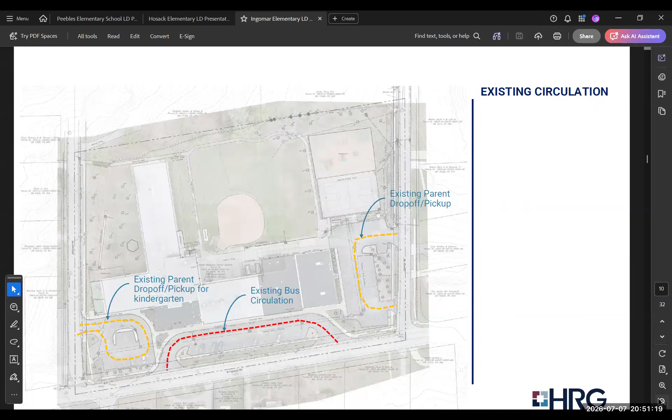So this here is the existing circulation. They have the kindergarten pickup drop off there to the left. You have the buses in the middle in red. And then to the right in yellow is the current parent pickup drop off. If you go to the next slide, Matt. By adding this extra parking and that other driveway entrance, it greatly extends the queue length and gets the parents off of Grosick.

And so if you eliminate the proposed driveway, we're not really adding any length to improve circulation for parent pickup drop off. If you remove the existing middle driveway, now we're limiting how the service truck comes in for deliveries, and we're also limiting the fire truck getting to the fire lane that's currently there. And if you eliminate the driveway closer to West Ingomar, then we're shortening the queue length for parent pickup and drop off as well.

So we're not solving their issue with the queuing and things for the parent pickup and drop off. So if I'm understanding your use of the word queuing, nobody parks, they just stand in the drive? Yeah, so they'll queue. My understanding is that the cars just line up. Yeah, they line up in the driveway lane, in the parking? Correct, yes.

Does that prevent people from backing out or getting into their spot? If somebody was parked and wanted to leave, if there's 10 cars queued behind them, can they not get out? Most of it's staff parking, and if they do want to leave at that time, then they're not leaving. Okay, so it does block them from backing out. It does. It's the front of the building, we have parking up there, and that's where we have some traveling teachers. So there's designated parking spots up there for them.

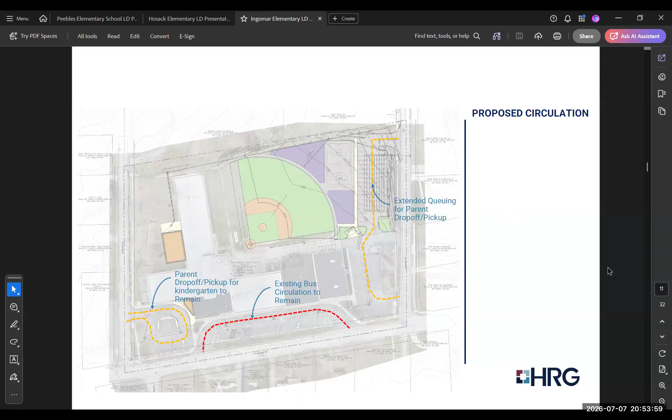Just a question for you. So you've got where your new parking lot is, there's the adjacent property owner just north of that. How was the buffer addressed for that? Trees there now? Yes, so as part of it, sorry, some of the other ones, we're removing trees, so that was gonna be another topic. In this plan, we were trying to meet the requirement, and it currently does, but Brandon had brought up a concern how we were showing those trees to the left of the ball field, and he had concerns about safety and not being able to see the playground well out of those windows.

So with that, we would be kind of in that same situation as the other projects. It wouldn't be as many. I don't know, was there 2, 4, 8, or like 10 or 11? But we would be asking for that similar modification. So like piggybacking off district property, where can we plant extra trees? For these sites, we're not going to be able to plant any additional trees on these elementary school projects, and maximize the parking, right? You want to maximize the parking. Correct, mitigating trees. We're back to trees.

Yeah, when I say maximize the parking, they need the parking because it's a safety thing. There's not enough parking now, so cars kind of have to park wherever when there's events and things, so by adding this extra parking, it's getting the vehicles on site and not creating hazardous issues. So, let me be the devil's advocate. You're constrained on parking. You're gonna build a really nice little league baseball field there. Isn't that just gonna increase the demand?

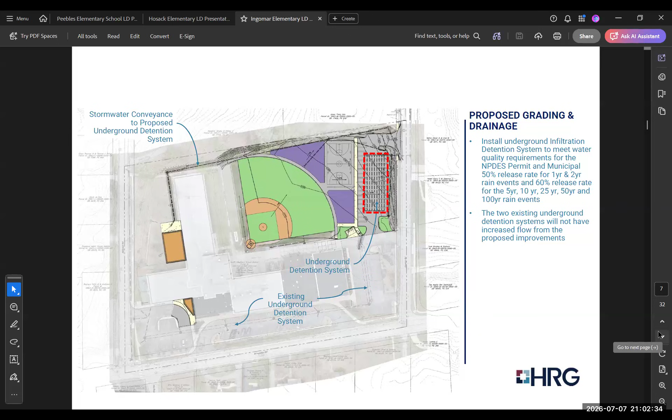Any other comments? Any more on the presentation? It was — I mean, they have the building additions, but again we're just making... I must admit, I think the architectural additions really seem to tie in nicely, whoever is responsible for that. There you go. Some pictures that look good. I hope they look as good in real life.

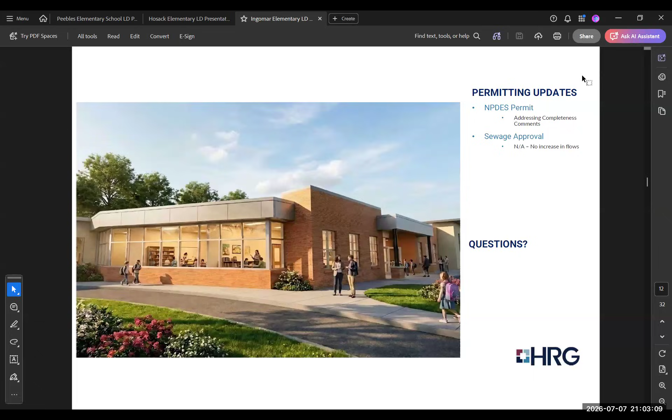All right, any more public comment we need to hear? Doesn't sound like it. So for the issue of PLC 26-18, the school plan, looking for a motion to table this one as well. So moved. A second. Second. We have a second. All in favor of tabling? All opposed? No opposition. All right. Thank you.

Just before you call us to order, a note for the planning commission on the next two items on the agenda. This was noted in my staff report: PLC 2619 and PLC 2620 are both applications that have to occur in conjunction with each other. There's a request for a lot line revision that goes in between two different zoning districts, so the MPC requires that a rezoning occurs prior to a lot line revision. We wanted to note that specifically because there's a specific process point for the approvals on this item. They can happen concurrently, just one action in front of the other.

Correct. Okay. And are we dealing with both of these issues tonight, or is this one tabled? No, these are both items that will be presented.

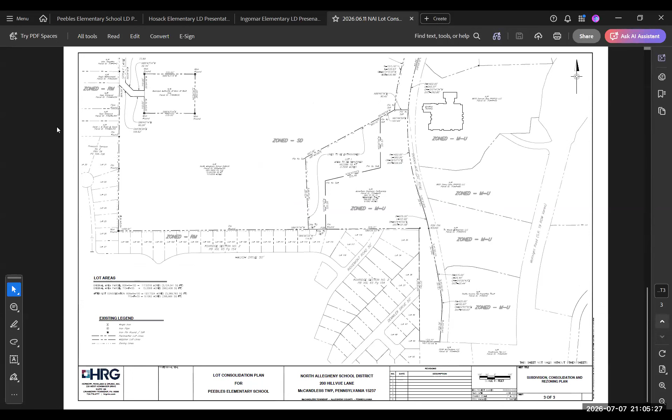Floor is yours. So actually now I'm realizing I didn't bring the presentation I did for this one, but I'll still try to be brief. You can share it, Josh. I'll try, if you talk through it, Greg, I'll try.

The gist of our request is there's an adjacent property owner along Duncan Avenue, Adventure Champion Partnership, who's looking to dedicate part of their property to the district. Their property is zoned different than the district's property, we're talking NAI. So we're asking for a rezoning of certain pieces of property, not the whole thing, about 6 acres, that the developer is looking to dedicate to the district. Once that's rezoned, we'd consolidate it into the overall NAI campus to make room for a future project, looking for safer access up into NAI and additional access. That will be forthcoming, but that's the main gist of our request.

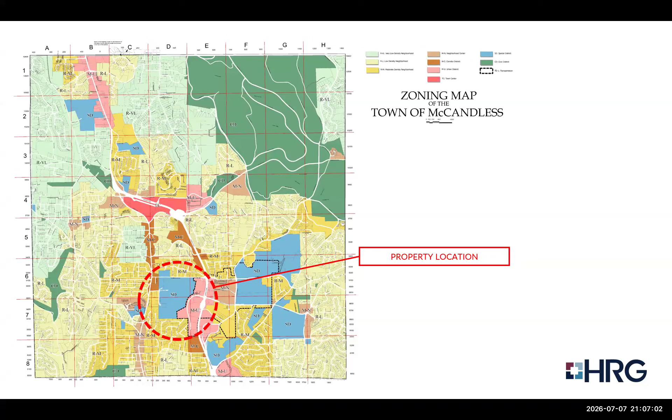So they're actually holding property also, though, the part of the parcel they're dedicating to you, correct? Behind, west of their existing parcel. Keep going, one more.

There in red is the current NAI campus, and blue is the parcel that Adventure Champion Partnership owns, which is by that Allegheny Health neighborhood hospital and the Lowe's. If you go one more, Josh.

Those two dark areas are the areas they're looking to dedicate to the district. Unfortunately, they're two different zoning districts, so we have to rezone the piece that they're going to dedicate so we can consolidate it together. I know it's a little messy.

Is the school... yes, correct. What is that just to the right of the blue, is it a daycare? No, this is middle school. I'm sorry, it's senior living, it's a senior living facility. But senior living is the further down building, it's the daycare, Doodlebugs I think it's called. Yeah, it's right behind the hospital. The smaller one is the daycare, the larger one is the senior living. Right, the one that has the center is Ridgecrest. Yes, this is Ridgecrest.

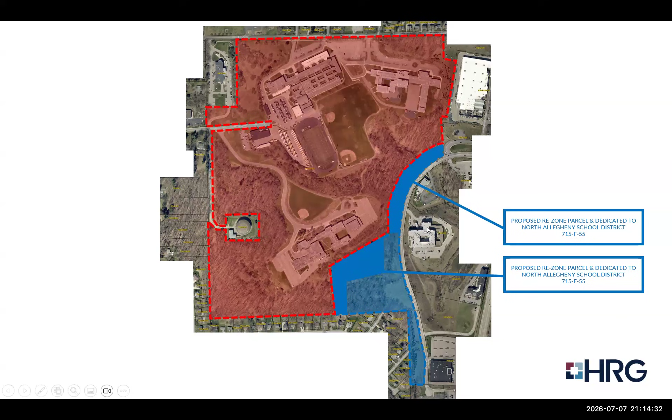PLC 26-19 zoning map amendment request, North Allegheny School District, block and lot 715F55. Can we get a motion to approve the zoning map amendment request? Is there such a motion? I guess just for clarity, it would not be the entirety of that block and lot, it would just be part of it that's depicted here. Yes. Is there a specification we need for a motion regarding that, because of the specificity of the application? I would assume the application is specific. So if we're voting on the application, you don't need to specify. Thank you. So assuming it's application specific, is there a motion to approve? So moved, second? All in favor? Opposed? Hearing none.

The second item to be voted on is PLC 26-20, Duncan Avenue Plan, lot line revision, block and lot 715 F55 and 826 N100. Any public comment on this item? Hearing none, can we have a motion to approve the Duncan Avenue Plan lot line revision, block and lot 715 F55 and 826 N100? So moved, second? All in favor? Aye. Opposed? The ayes have it.

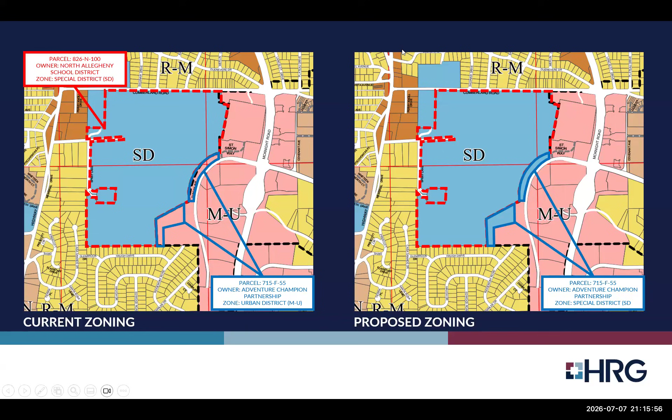Thank you. You're welcome. Thank you for your time, I know it's been long and I really appreciate all the feedback. Thank you for your patience.

So thank you everybody for dealing with the technical issues, it will get worked out eventually, we're gonna get there. It's a lot.